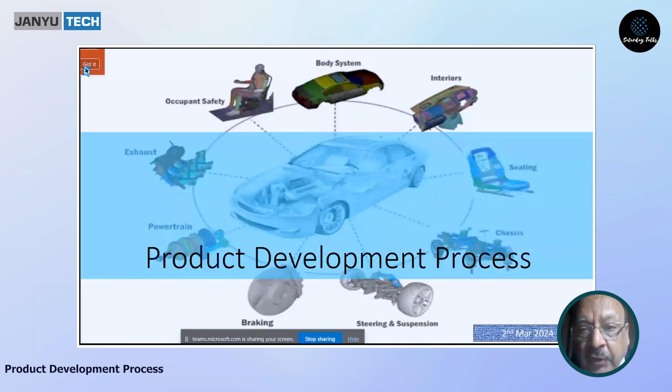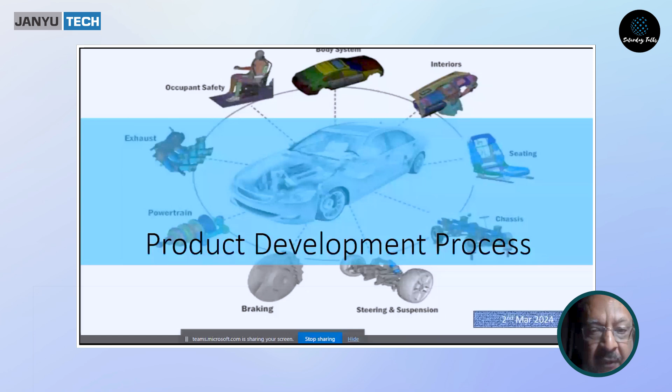Where is the catch? Where is this equation wrong? Well, the equation is wrong because Rolex believes in developing niche market watches. This means that they develop one model for only 50 or 100 people. The watches are designed for the presidents of the world, not for me and you. Now, when you have a development cost of about $100 million and you have to divide it on 100 customers, one customer has to pay $1 million purely for the development cost, irrespective of the raw material or manufacturing cost. So here you get an idea of the level of development process and development costs. If we cannot contain this development cost, our product will not be marketable.

Next slide, please. In General Motors, I was heading the small car, that is the Chevrolet Beat, and I developed the car for the whole globe. We were working on budgets like $500 million for one car, and our testing cars alone were about 500. Now compare that to our erstwhile Indian companies. Their budget for development was not even 1/10th or 1/20th, and the testing cars were not even 1/30th or 1/40th. So if we want to develop a good product, the product development process is huge and involves huge costs. So the level of seriousness required at the working level, at the management level, and the involvement of top management has to be very, very high.

Next slide, please. Now, the stakes are so high that it's not just an engineering department role. So many teams are involved, from engineering, design, manufacturing engineering, after sales, our supply chain people, our purchase people, that the biggest task is to keep all these departments working in one direction. Each department has their own goals, but someone in the center has to keep all these puppies within the farm. They should not be moving here and there. Everyone should have a single goal, a single day.

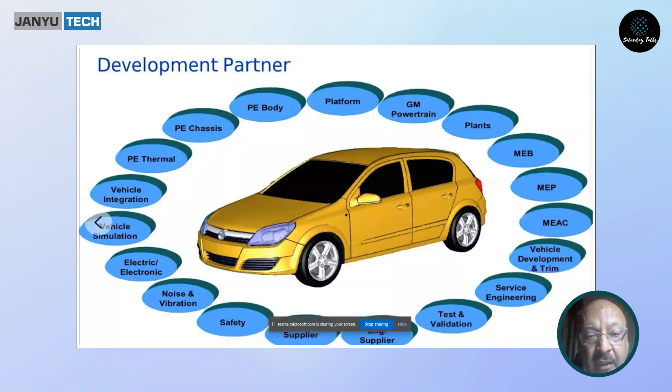Next slide. So this center role is to be done by a program manager. Depending on the program, he may be a manager, a director, or a vice president. And his key role is to focus on 4 things: cost, quality, value, and timing.

And then he has to run them through program planning, his leadership, the financial management, the governance, and finally the execution of the program. Next slide.

So broadly, I'll try to cover what are the technicalities in development. On one side, we have the engineering responsibilities, and on the other side, we have the manufacturing processes. The manufacturing processes will be controlled by APQP. We'll discuss a little bit on the engineering. So the first portion is market research.

Here, we want all our customers, actual customer, marketing, evaluation agencies, external, internal, and from that, we will generate ideas. Here, an important part which most organizations forget is the lessons learned and the regulations must be placed on table. What went wrong in the previous launches in detail by department. Those have to be tabled so that there is a concrete method visible that those will not happen again.

Then comes the concept creation. Once we have that, we have to see whether this concept is feasible. The demands of various departments may be too high, and thus that has to be thought about with the entire organization, the costs involved, the time involved, and then we develop a concept. What are we going to do? Once we know what we are going to do, next we know what are the challenges.

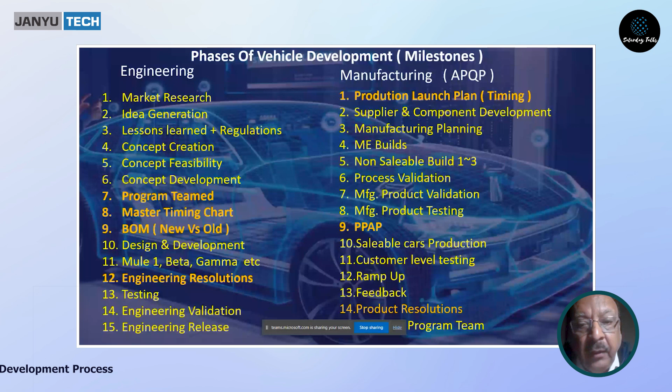So whatever we saw in the slide prior to this now has to be made into an actual product development process, so that we can define what activities can be run in parallel and what activities will run in series. So here the dates of engineering involvement, the start of their involvement to each department, need to be clearly defined.

And as we go into a bigger product development process, the individual departments within engineering, their chart also must appear. The more time we spend in building this, the better will be the launch, the fewer problems, and the lower the cost.

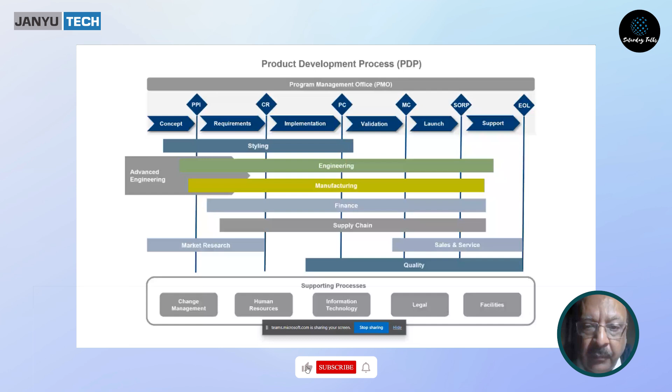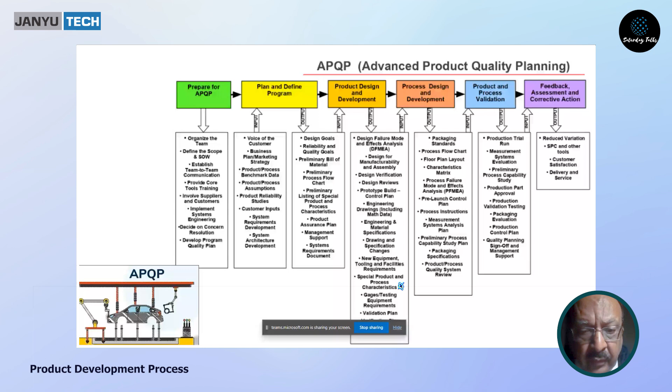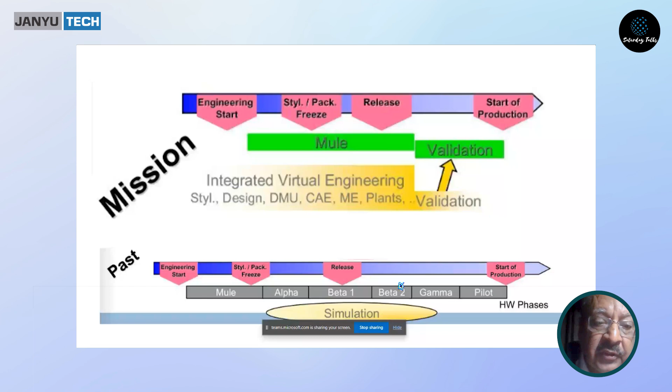Now, as I said earlier, these mules and all are history. Today, 80% of the engineering development has to be done on a computer. The more you do things in virtual engineering, for example, how the engine will go inside the car, everything can be done, and you have to develop your own software, maybe not for a specific program, but it should be generic so that in future also it works.

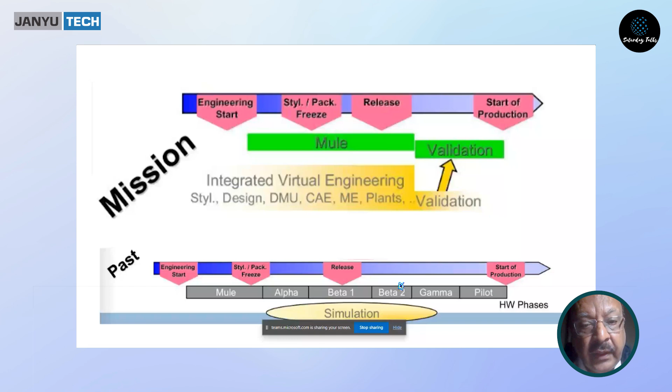And why I am saying we need to have this kind of a chart: everyone in the organization is not an engineer. It's very difficult to explain to each one, right up to the team member who's going to assemble the car, what is new and what is not. When he sees things in this kind of a chart, he knows what is new that I have not handled and what is coming as a carryover which I have handled.

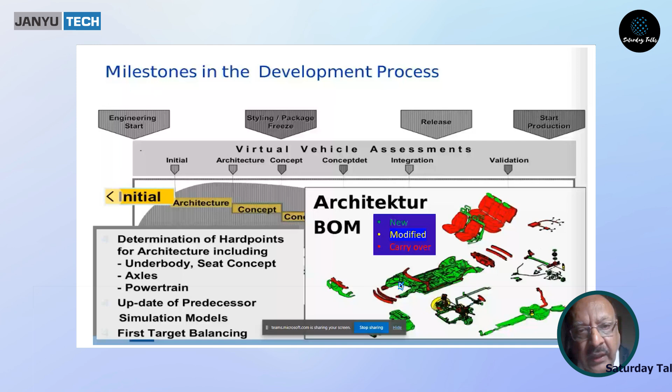So here we've already said that the various milestones have to be developed. I've given what gates we need to keep. And excuse me, this presentation is from a different country, so you'll find words not in English also.

So the more we do the breakups, and when we have a milestone meeting, it should be represented by all the vice presidents right up to the CEO. It looks unnecessary, but if the decisions are not taken on time, or the importance of that decision is not understood or passed on to the top people, it could have impact on the program.

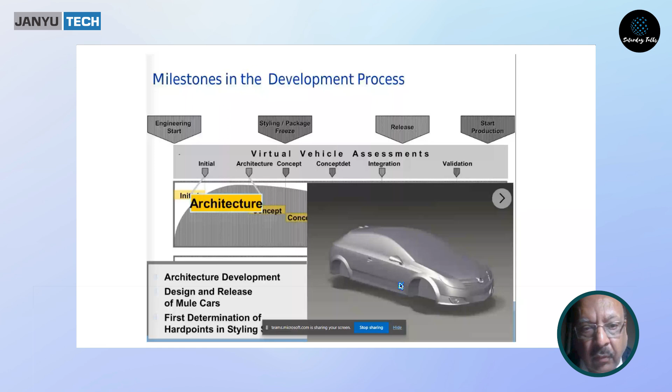Next slide. So these are all related to the subcomponents of the development process. I think I've covered most of them. You can refer to them on these slides later. Next slide, please. So as we discussed, everything has to be done virtual in engineering. Similarly, in manufacturing also, everyone has to be involved in a virtual assessment.

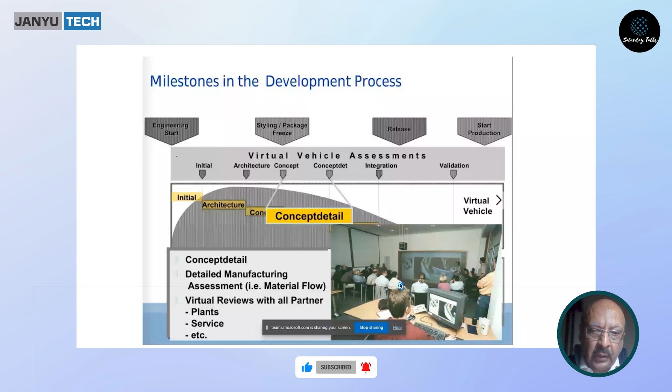It shouldn't happen that the actual car has to come for him to understand that this wiring harness cannot go into this hole. If the working persons have already reviewed that, this kind of situation will not happen. So when you are having a manufacturing assessment virtual, your quality guys must be present. Your press shop people should be present. Your body shop people should be present. The guys who are going to assemble the car must be present.

So everything in every organization now has to be developed so that we can improve our virtual assessment, be it engineering or be it ME, manufacturing engineering, or our entire manufacturing process. And believe me, in my experience, 90% of the issues used to emerge in the virtual assessment. And rather than spending so much time on development, redevelopment, it helps us correct it much ahead.

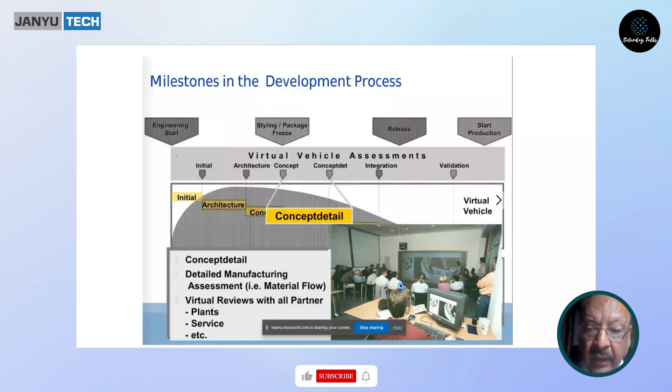For example, if I know that there is a problem and I know it today, I have adequate time to correct it. But if this problem comes to me during the saleable builds or non-saleable builds, I've already lost maybe 1 year or 2 years. Average time for a car development is 5 years. So if someone wakes up 2 years down the line, my risk, costs, challenges are multifold.

So when we've gone through this, engineering has to now start preparing for the release of the SOR. What are the components? Engineering now has a clear idea, manufacturing has a clear idea, and they have to start with the drawings of that product, 3D drawings, 2D drawings, and what are the tests and validation requirements, what are the lessons learned for each component earlier, what aspects the supplier needs to take care of, and what are his dates by which he has to supply, how many numbers and all.

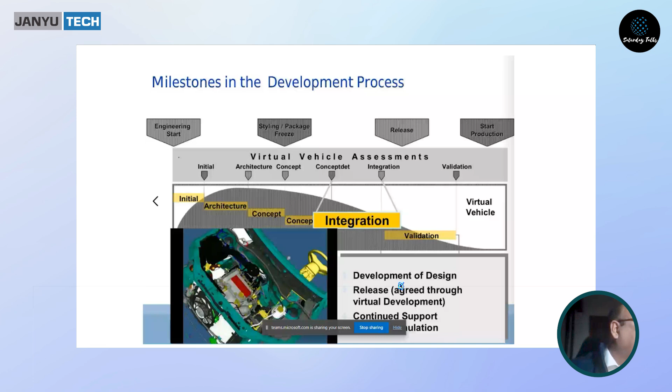So if this entire process is done, the draft SOR starts getting made. You don't have to wait for the entire cycle, because the supplier who has to develop the component must know well ahead of the program what he needs. Next slide. Now, as I said, you release the SOR and you're going to do some virtual analysis and you're going to do some actual testing also.

Engineering has released a draft kind of SOR, but when we see these components coming, they may have some problem in the marriage between each other or in the design or performance. So at late stages, you need to modify the drawing. And when you modify the drawing, this looks simple, but it is not, because here the supplier gets an opportunity to twist your arm and ask for whatever amount he wants, because you've already developed 90% with him. For a small change, he might be asking for a totally unreasonable amount, and you have no other method of ignoring it. You have to give it to him.

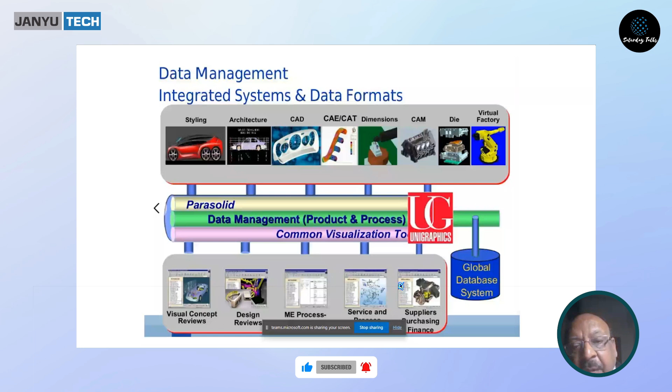And then we must have adequate time for iterations. If the reports come negative or you have to do changes, that time for iteration must be kept. Next slide. Now, unlike in the previous developments, today a lot has to be done with the active role of the IT department. There is huge data. The data has to be kept secret, and the data must be able to speak to the other systems. So for this, depending on the product you're developing, your IT systems and data formats, etc., everything may have to be developed way ahead of the program itself.

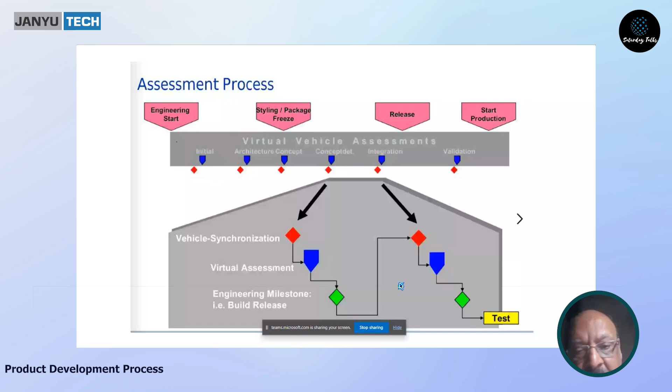Last slide, please. So having done all this, starting from the start of the program by engineering to the start of production, it will go through virtual assessments, engineering milestones, and then everything depends on the testing. For example, if you're testing only 5 cars and one component fails, calculate the ppm. That's 20% of the components will fail, and I won't even know if any component is failing less than 20%.

So selection of the size of testing is very important, and that's why in General Motors they were going to 500 pieces for testing. So this is all about the assessment process and the development process. I'll be open to any questions.

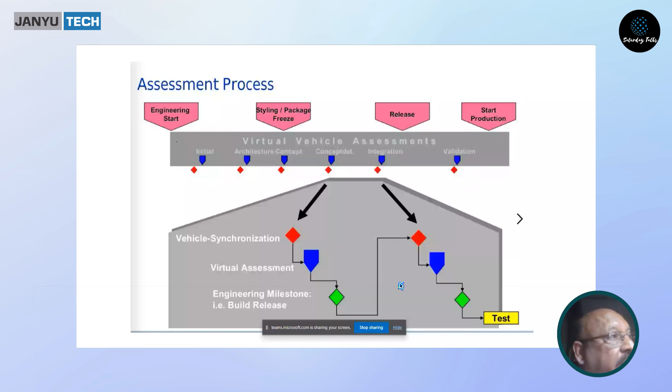Thanks for accepting our invite, sir. I have a question. You mentioned that you take almost 5 years to develop a totally new product, approximately. And you must have come across some situations where within these 5 years, there is a change in the taste of the market or the market demand. So have you come across such a situation, and what is the mitigation for it?

See, your question is good, but these changes you are saying the need has come basically point out that your research was not adequate or not ahead of time. For example, if the outer shell of the car is already designed, can you really change it just because someone wants a change? There are some things which you cannot change, and some things you can change at a cost. Some things cannot be changed even at a cost, unless you want to throw the car program out by about 2-3 years.

So as I said, in the whole process, make sure that the stakeholders are involved from day one. And normally my learning is that the stakeholders are least bothered till they see a physical car, and by that time it is already 2 years, 3 years into it, and then they start giving their observations. That's too late. So unless your CEO and MD sit in the meetings, you won't have these people coming and giving their views, and they will come 2 or 3 years later and say, no, this should have been there. So it really boils down.